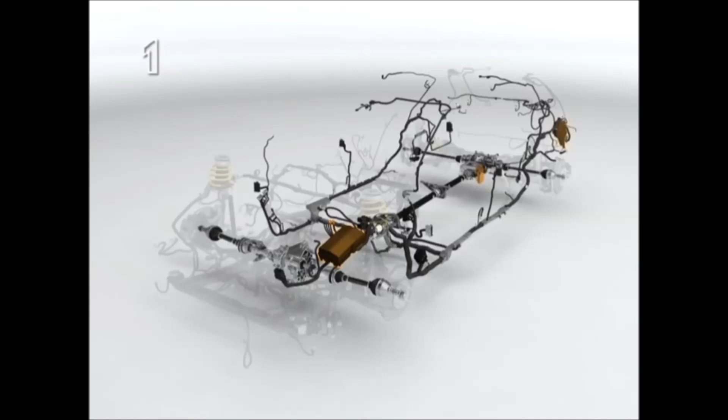It has a dedicated electronic control unit that works together with ECM, TCM, and the ABS and ESC control units.

This gives the driver maximum road holding and strong, smooth acceleration, with imperceptible transfer of torque between the wheels.

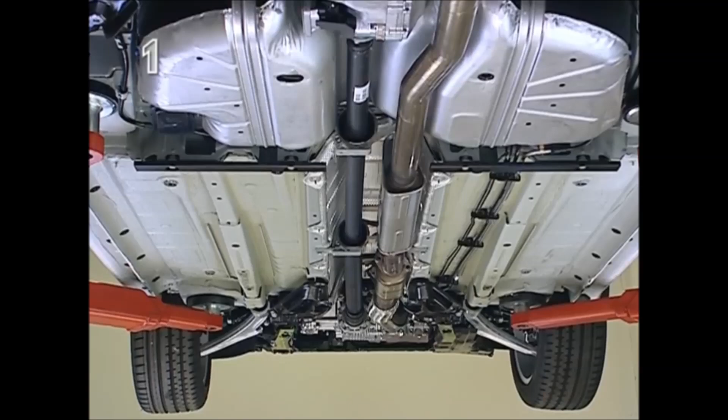The chassis has been precision-tuned, and the all-wheel drive and ESC are integrated in such a way as to ensure optimum road holding and performance.

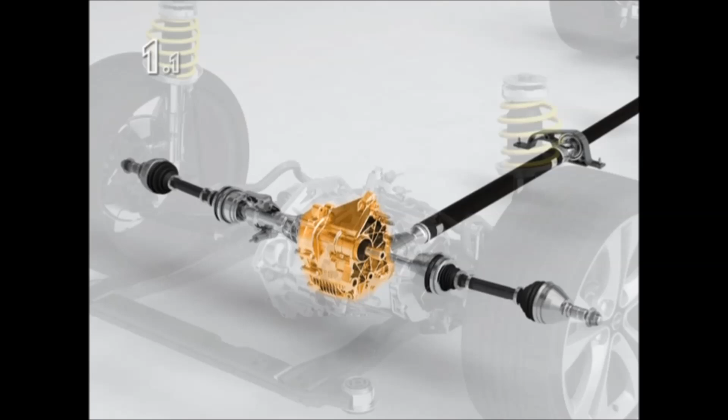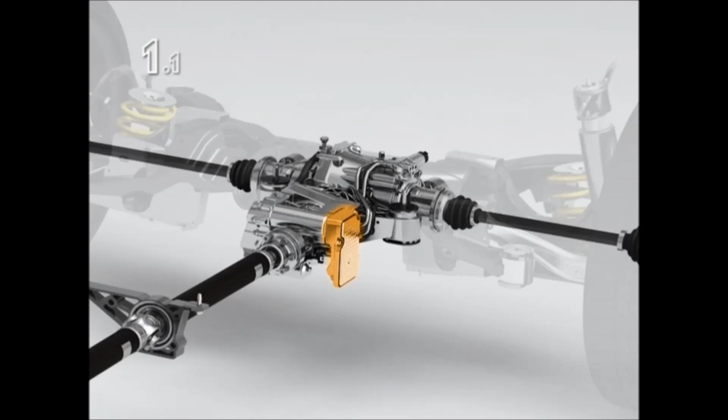The all-wheel drive system comprises 5 main components: the transfer case, the propeller shaft, the differential clutch, the limited slip differential, and fitted as standard from model year 2009.5, the limited slip differential clutch. The system also includes the all-wheel drive control unit and the hydraulics.

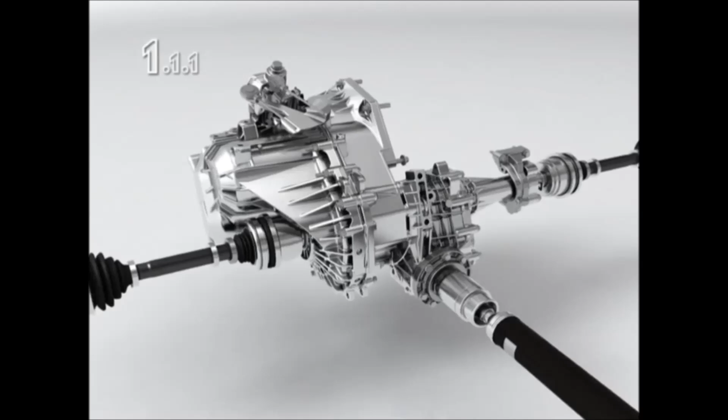The transfer case is attached to the transmission using bolts. It's an essential part of the all-wheel drive system. The transfer case makes it possible to drive the front wheels and the rear wheels together.

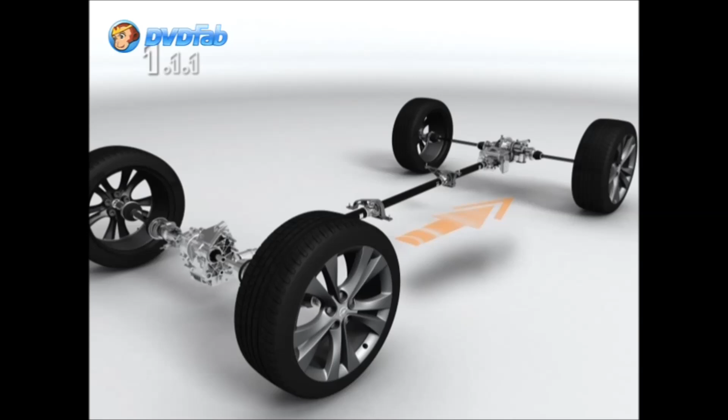The intermediate shaft to the right-hand front wheel passes through the transfer case. The gear wheel on the drive shaft drives the crown wheel shaft, while the bevel gears drive the propeller shaft.

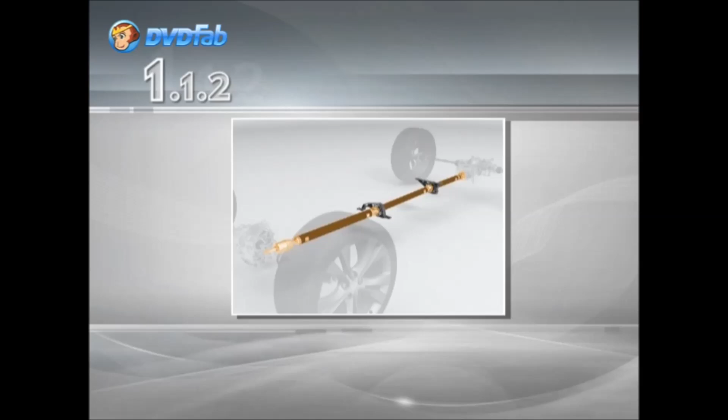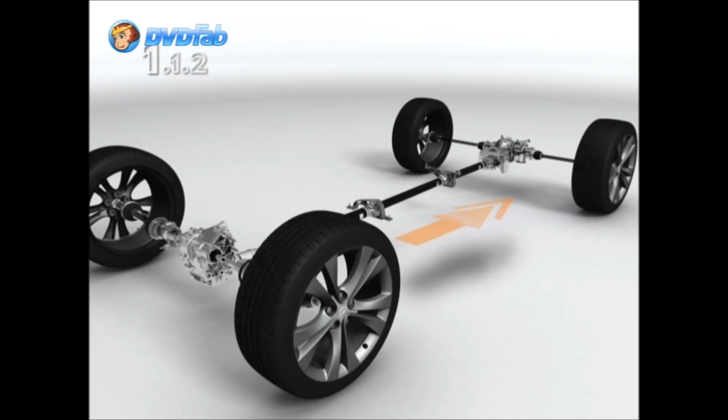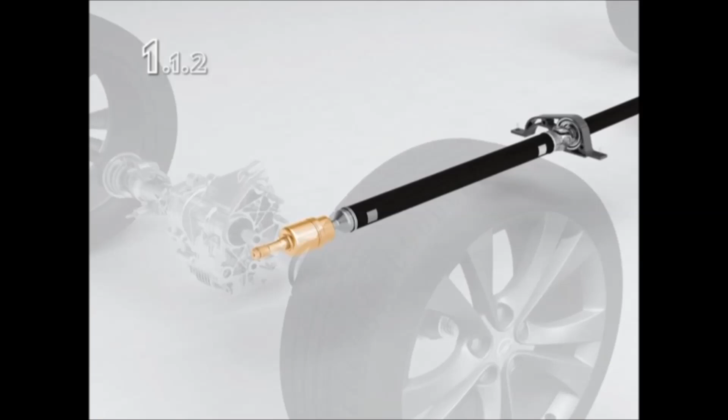The propeller shaft transfers power from the transfer case to the differential clutch. The propeller shaft consists of 3 pipe sections: a front drive joint, 2 universal joints in the middle, and a rear drive joint.

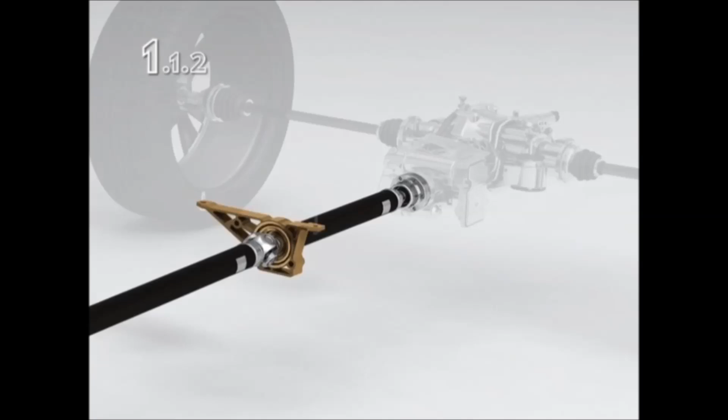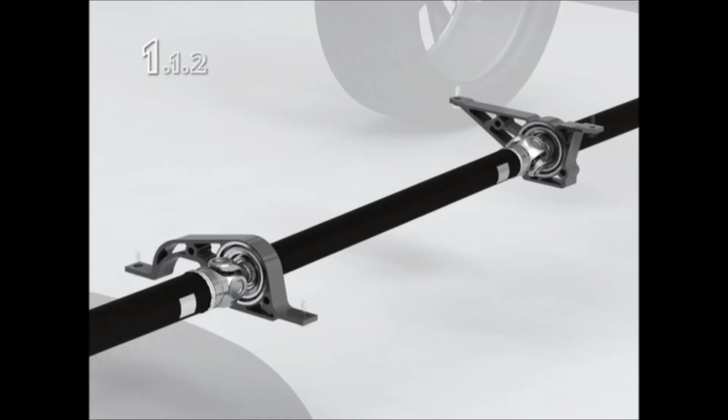The propeller shaft support bearings are located at the universal joints. The bearings are mounted in rubber bushings, seated in brackets. These, in turn, are bolted to the vehicle underbody. The brackets are precisely positioned during manufacture.

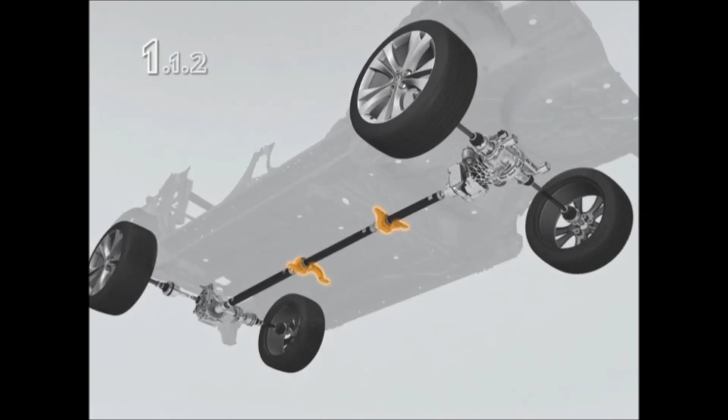In order to prevent vibrations, the propeller shaft is installed in a straight line between the transfer case and the differential clutch.

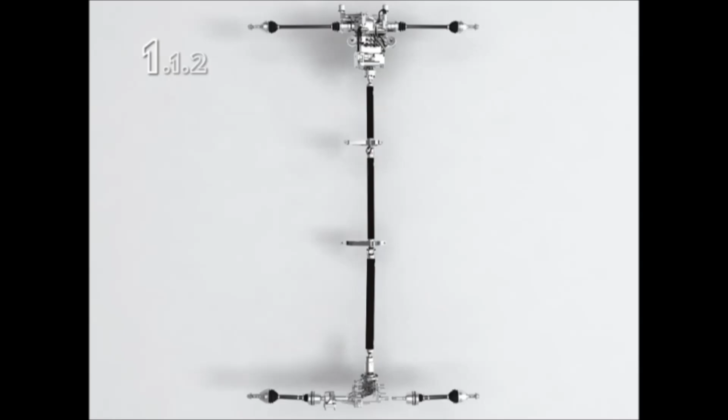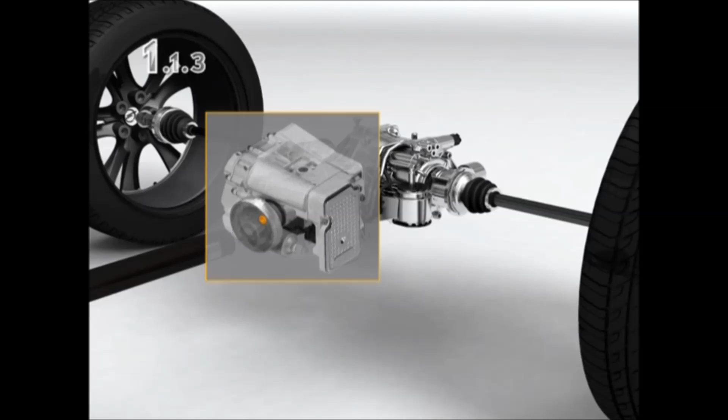The differential clutch is located in front of the limited slip differential and bolted onto it. The propeller shaft connects to the differential clutch at the front edge, while at the rear edge it connects via a splined shaft directly to the bevel gear of the limited slip differential.

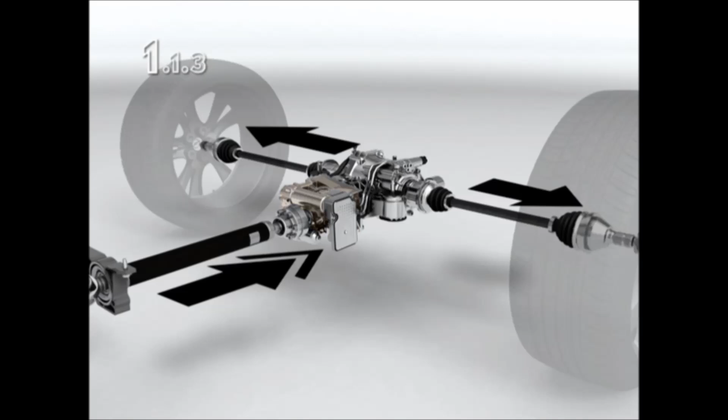The all-wheel drive control unit is mounted on the housing. The main function of the differential clutch is to regulate the torque transfer to the rear wheels. A hydraulically actuated multi-plate clutch means that variations in drive between 0 and 100% are possible.

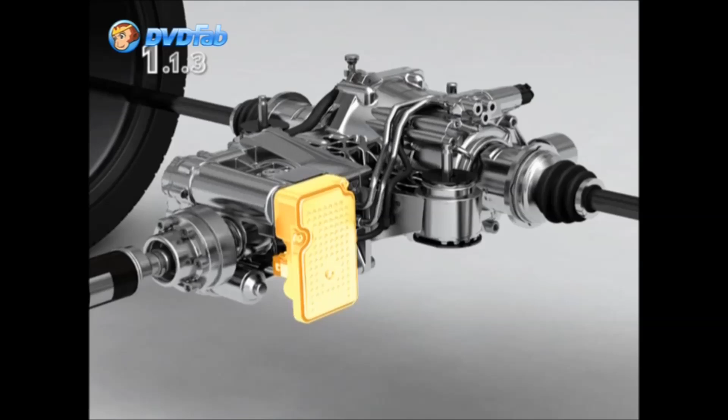Hydraulic pressure is built up with an electrically driven pump and regulated by the all-wheel drive control unit using a solenoid valve.

The limited slip differential is bolted to the rear axle beam. From here, the drive shafts lead to the rear wheels.

The limited slip differential consists of hypoid drive and a differential. The splined bevel gear shaft of the limited slip differential connects to the differential clutch.

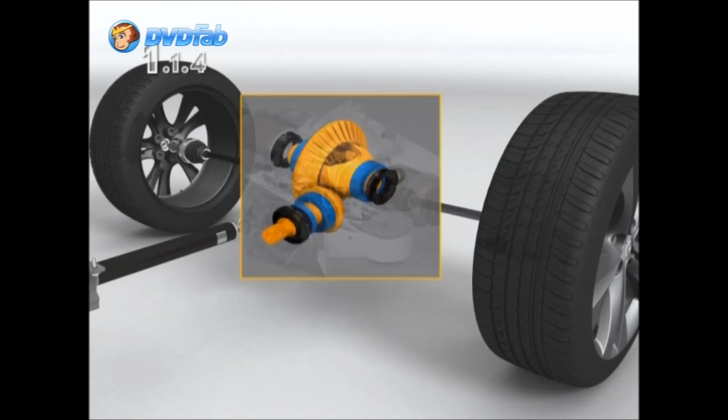The bevel gear drives the crown wheel of the limited slip differential, which is fixed to the differential cage. The differential cage contains 2 planet wheels and 2 sun wheels.

The limited slip differential clutch is attached to the left-hand side of the limited slip differential with 6 bolts. The function of the limited slip differential clutch is to fully or partially couple the left-hand drive shaft to the limited slip differential. This enables torque to be distributed between the rear wheels.

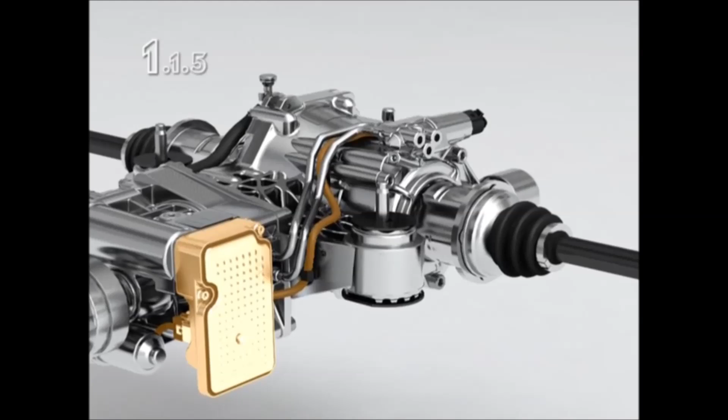The limited slip differential clutch is electro-hydraulically actuated by the all-wheel drive control unit using a pressure control valve mounted on the limited slip differential clutch housing.

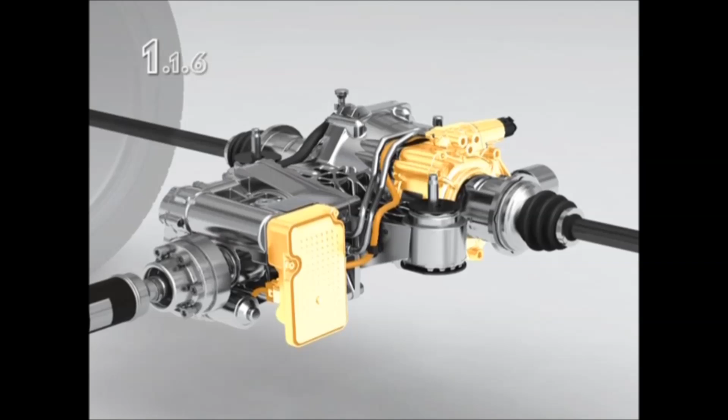The purpose of the control unit is to regulate engagement of the differential clutch and, on vehicles where it's installed, of the limited slip differential clutch.

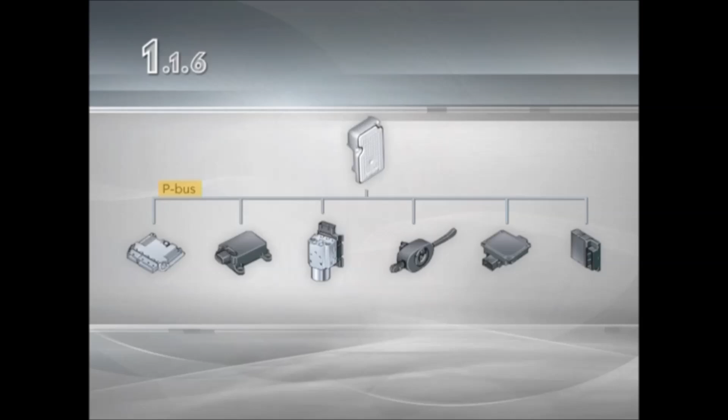The all-wheel drive control unit is connected to the vehicle P-bus. Bus signals coming to the all-wheel drive control unit are used to assess vehicle operation and handling, so that the appropriate torque can be transferred to the rear wheels.

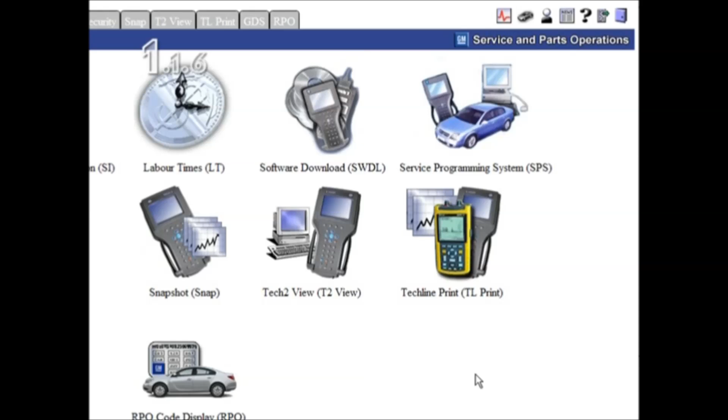The control unit software can be updated by programming with SPS.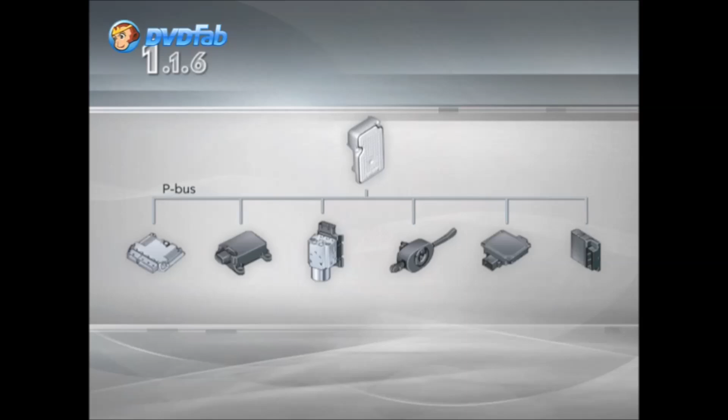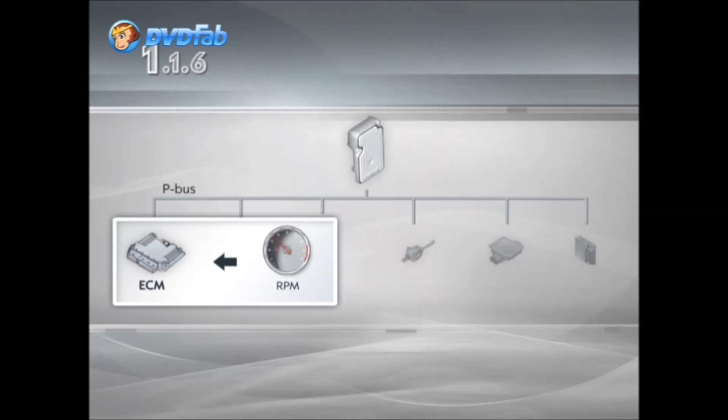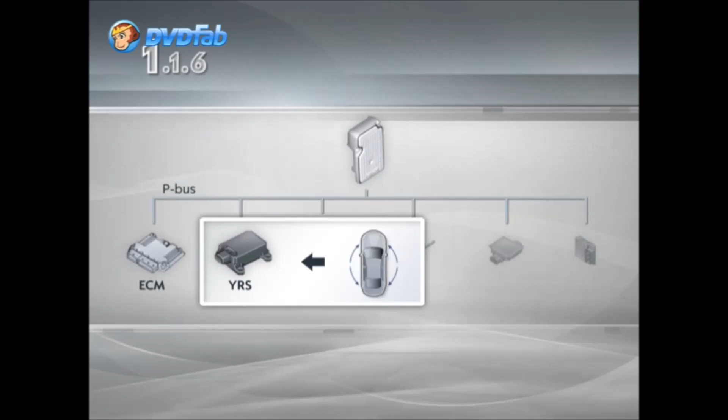The all-wheel drive control unit uses data from other systems. For example, the Engine Control Module (ECM) transmits the accelerator pedal position, the current and maximum torque, the engine speed, and pressing of the brake pedal. The yaw rate sensor (YRS) transmits the angular acceleration in yaw as well as lateral and longitudinal accelerations. The electronic stability control (ESC) transmits the wheel speed of all 4 wheels, and the column integration module (CIM) transmits the steering angle.

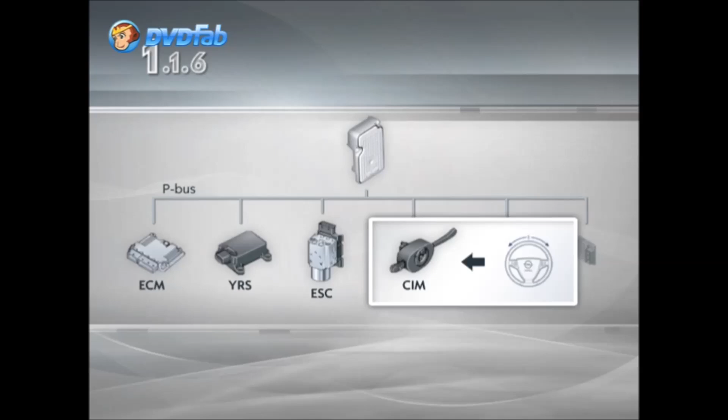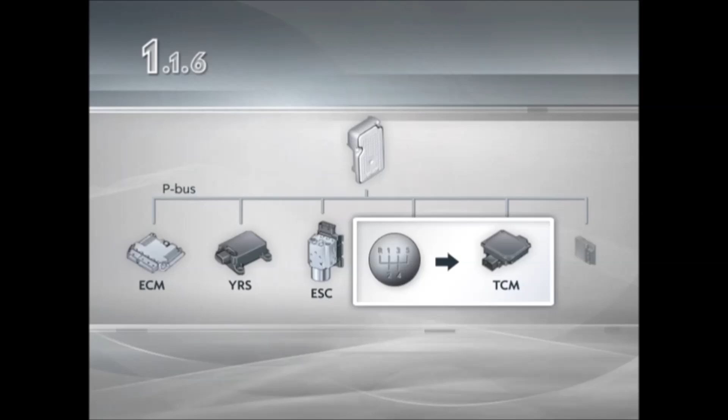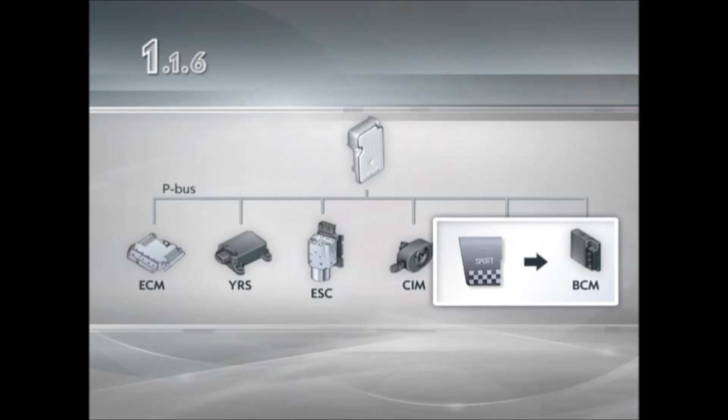The Automatic Transmission Control Module (TCM) transmits data about the selected gear, and the Body Control Module (BCM) checks whether the parking brake is on or Sport mode is enabled.

The hydraulic pump draws oil from the tank and pumps the pressurized oil towards the oil filter. From the oil filter, the oil flows to the accumulator, which works by storing a volume of pressurized oil. The oil is then led to the pressure control valve for the differential clutch and to the pressure control valve for the limited slip differential clutch. From there, the oil flows to the clutch cylinder. The oil from the valve bleed port flows back into the oil tank.

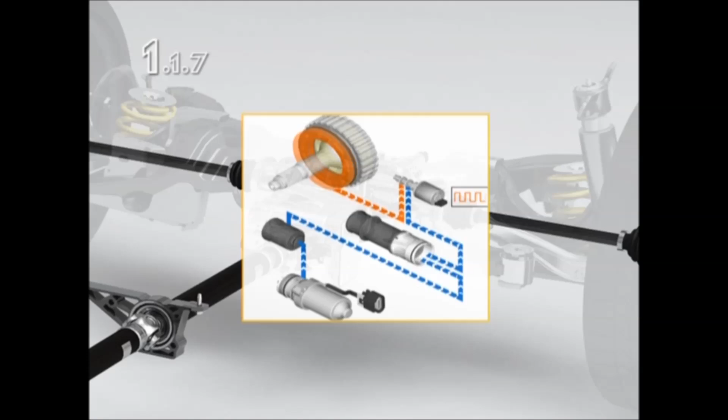The Insignia's adaptive 4x4 all-wheel drive maximizes stability and driving in all situations. Depending on acceleration and driving style, the torque is distributed differently between the front and rear wheels.

When accelerating in first gear on dry roads, most of the torque is transferred to the rear wheels. With increasing speed, torque is progressively transferred to the front axle.

When the vehicle accelerates from rest with low front-wheel traction, almost all of the torque is transferred to the rear wheels, until the front wheels have enough traction to take over.

Once the vehicle reaches a constant speed, the torque distribution is modified so that 5 to 10% is used for the rear wheels.

Reducing the torque at the rear wheels reduces fuel consumption. At the same time, a certain level of rear-wheel drive improves directional stability.

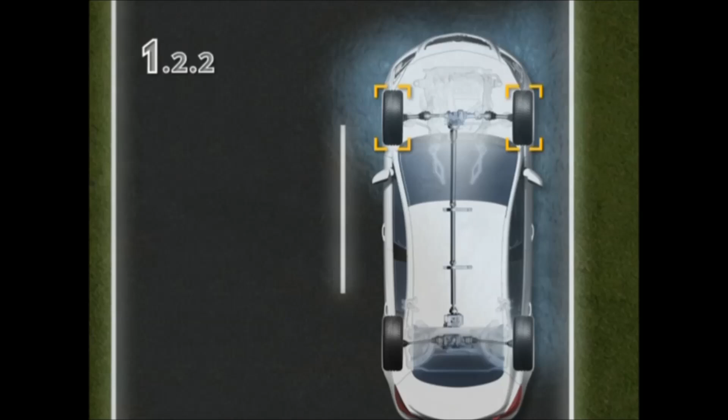When both front wheels and one rear wheel have low traction, on ice for example, the limited slip differential clutch transfers up to 85% of the torque to the rear wheel with the best traction.

At constant speeds, torque is usually transmitted 90% to the front wheels and 10% to the rear wheels. When accelerating, distribution is modified so that 55% of the torque goes to the front and 45% to the rear wheels. This improves stability when overtaking.

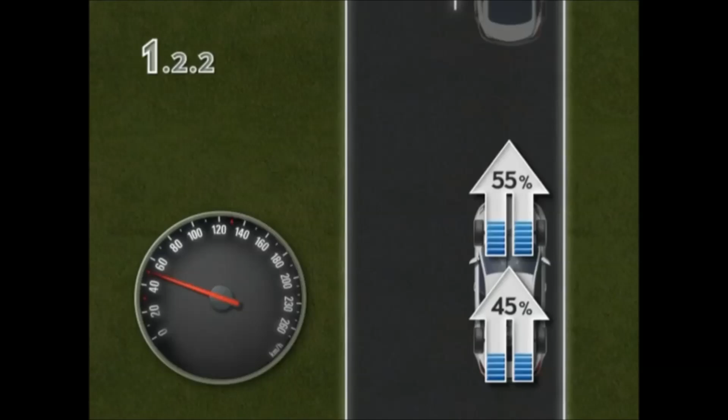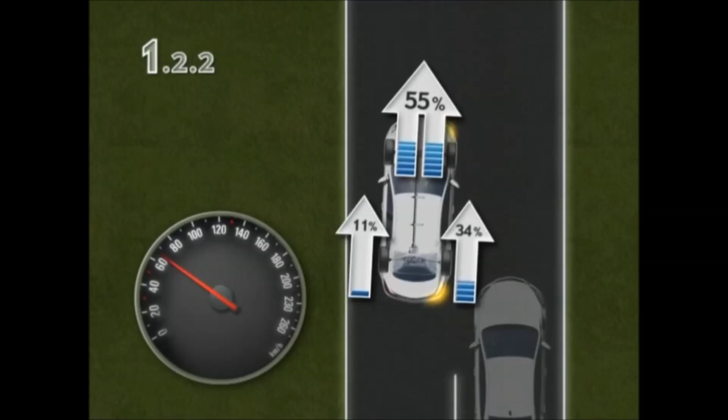In certain cases, like pools of water on the road or forceful steering, the limited slip differential clutch can transfer up to 80% of rear axle torque to the rear wheel with the best traction. After finishing the overtaking maneuver, the torque distribution returns to 90% at the front and 10% at the rear.

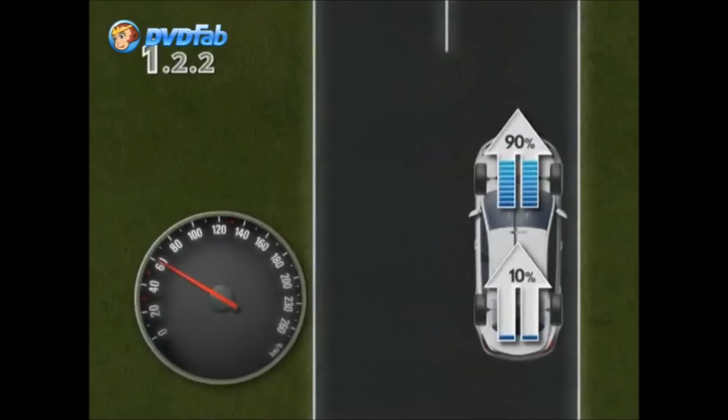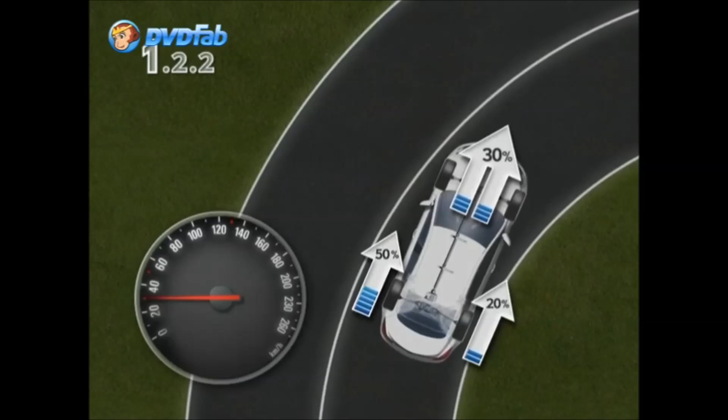When cornering, the distribution of torque between the front and rear wheels is modified in order to prevent vehicle understeer. The limited slip differential clutch transfers the torque to the rear wheel with the best road holding. This results in enhanced safety.

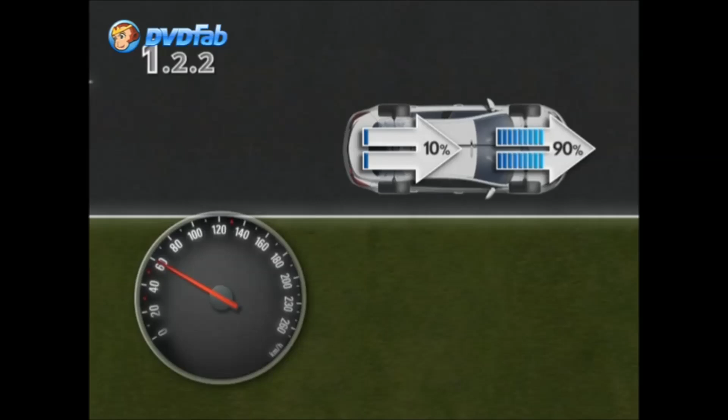If one of the vehicle axles is raised during recovery, the speed must not exceed 50 km per hour. No technical limits apply if all the wheels are rolling.

The ignition must be switched off when performing a two-wheel brake test.